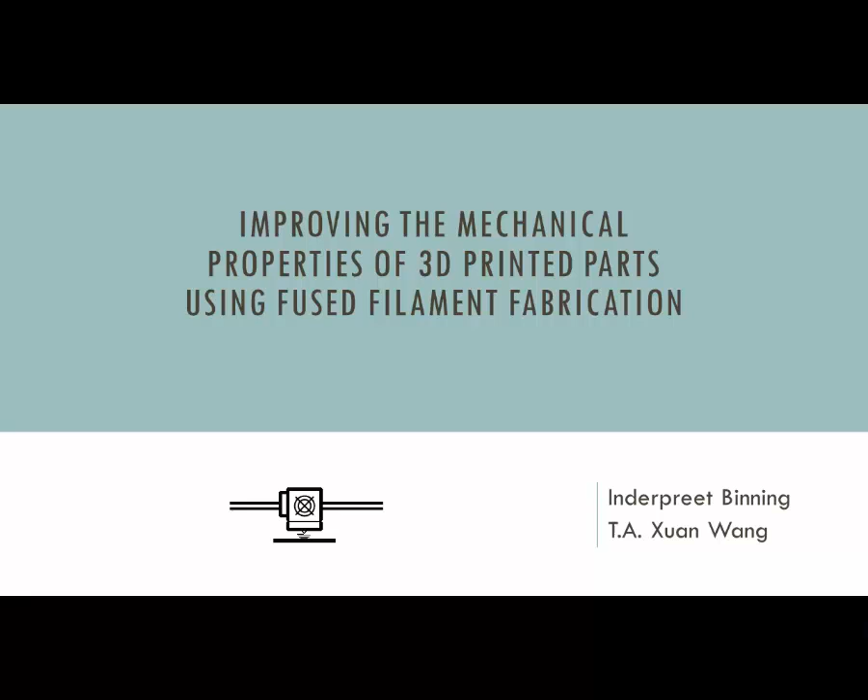Hello everyone, my name is Inderpreet Binning and my technical advisor is Dr. Wang. My project is titled Improving the Mechanical Properties of 3D Printed Parts Using Fused Filament Fabrication.

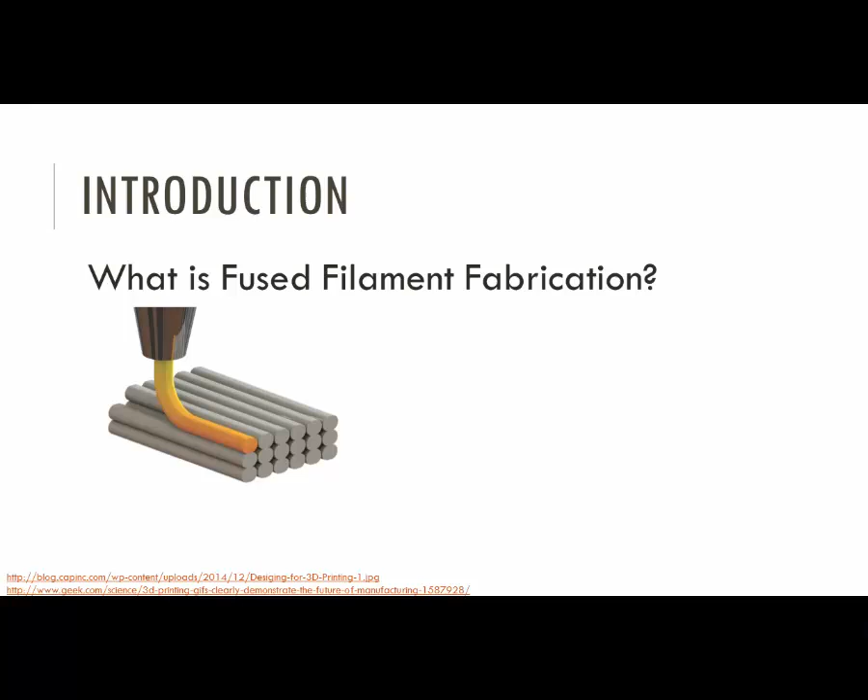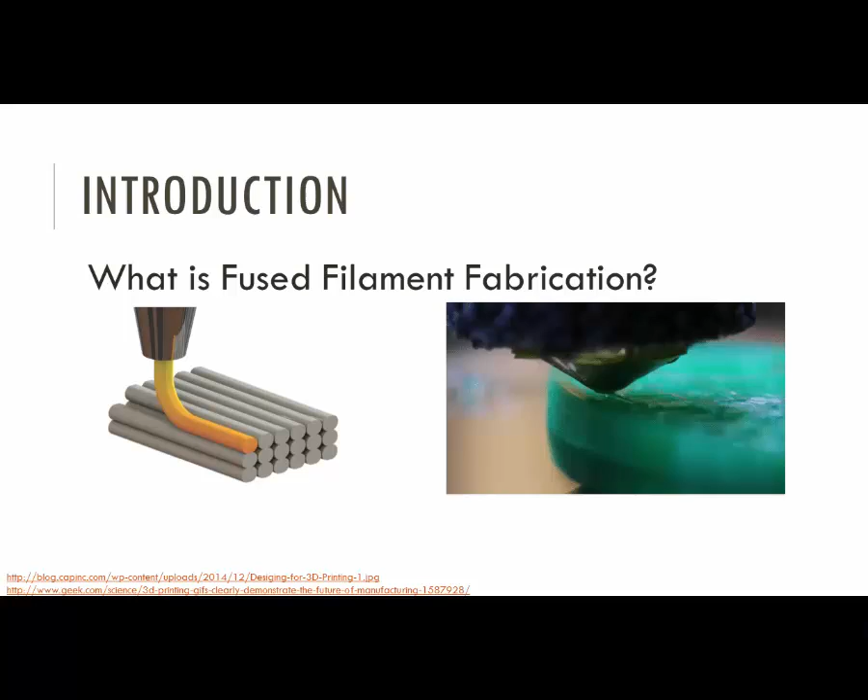So what exactly is fused filament fabrication? Well, it's technology used in 3D printing, and this technology works by heating up filament and depositing filament side by side on a print. As you can see on the illustration on the left, the material is deposited side by side, and then as each layer is completed, the process is repeated until the print is finished. The animation on the right side does a very good job of showing us this technology in action.

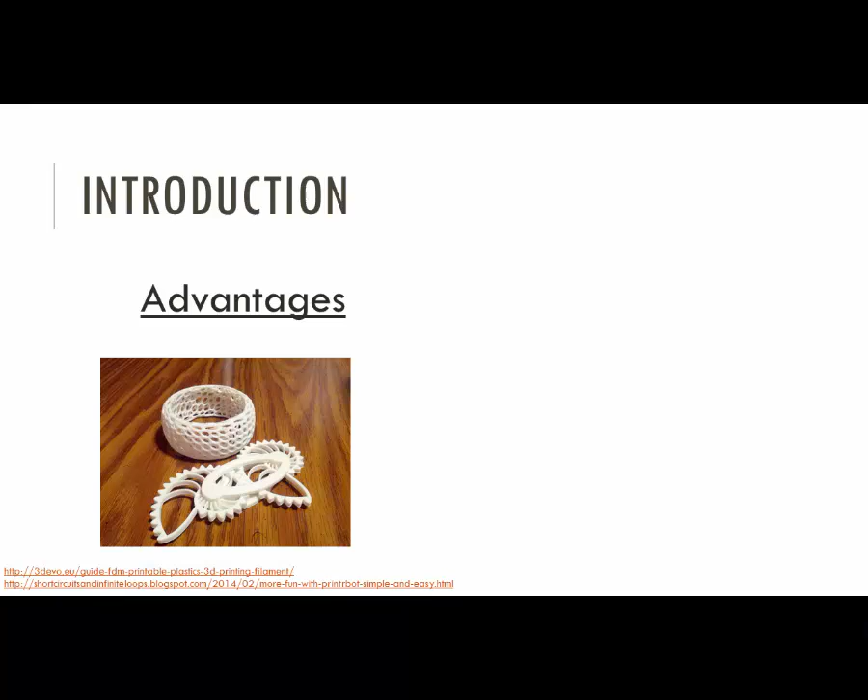So some of the advantages to fused filament fabrication are that it is relatively inexpensive, you get pretty good resolution, there is a variety of materials to choose from, and changeover is easy when compared to other technologies in 3D printing. There are some disadvantages as well. Some of these include the surface finish of the parts, the consistency of the prints and how they vary from print to print, and the biggest drawback, which is the mechanical performance of prints that are created using this technology.

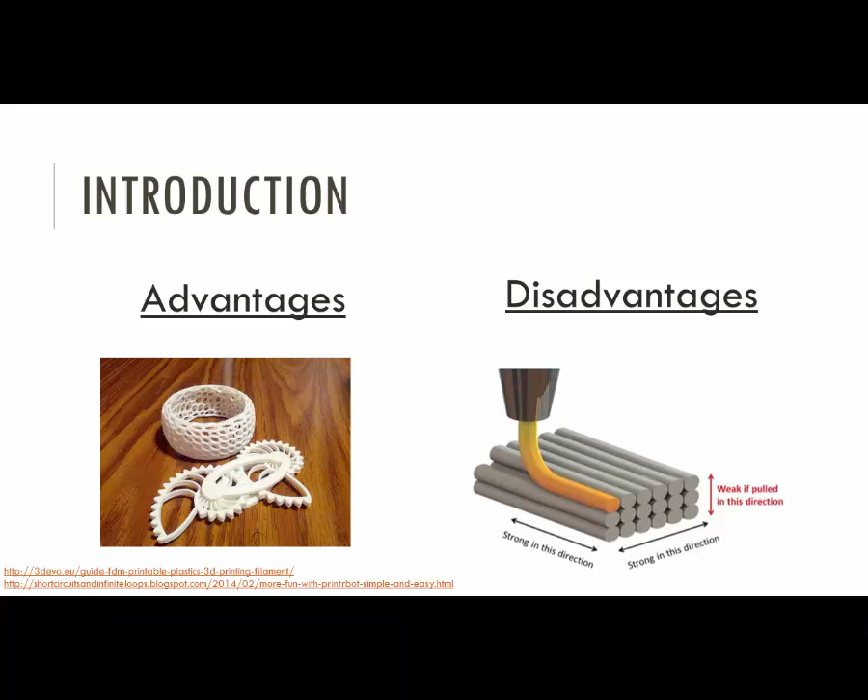And so fused filament fabrication lacks in mechanical performance, and this is due to the fact that the process itself is anisotropic. What that means is that the properties of the process vary due to direction or orientation. So if you were to compare, for example, a tensile load in the X direction compared to a tensile load in the Y direction. So in this illustration right here, in order to cause a failure in the X direction,

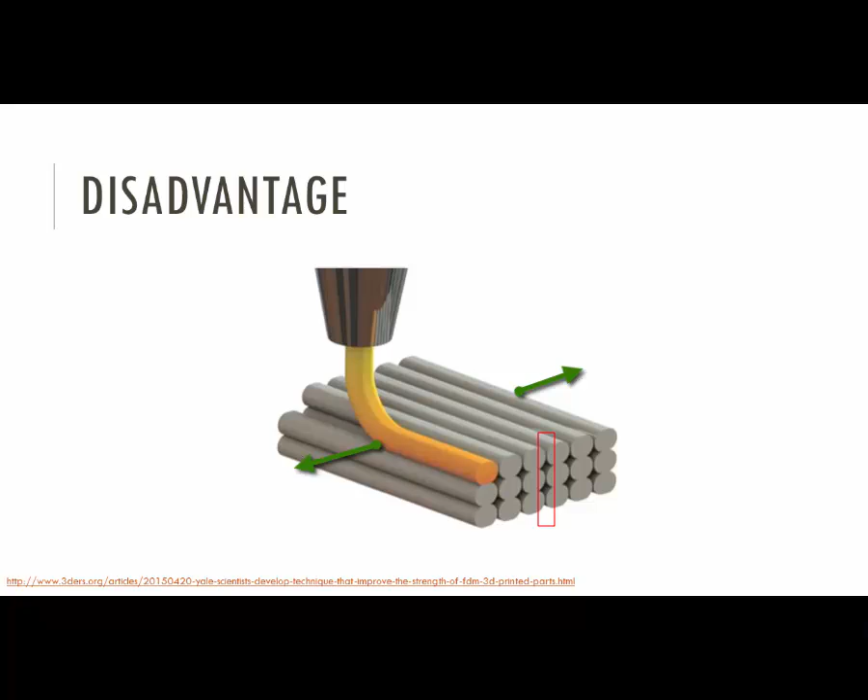I would actually have to apply a tensile load and pretty much pull these fibers apart. If I were to apply it in the other direction, in order to cause a failure, I would just need to overcome the strength of the bonds themselves. And so, as you can imagine, it's going to be easier to break apart the bonds, whereas it would be very difficult for somebody to pull apart the fibers and cause a failure that way.

And so the industry acknowledges that there is a lack of mechanical performance due to this process itself. And so the industry has come up with post-processing techniques. What that means is that after a part is done being printed, some sort of processing is done afterwards to improve the mechanical performance. One example is called infiltration.

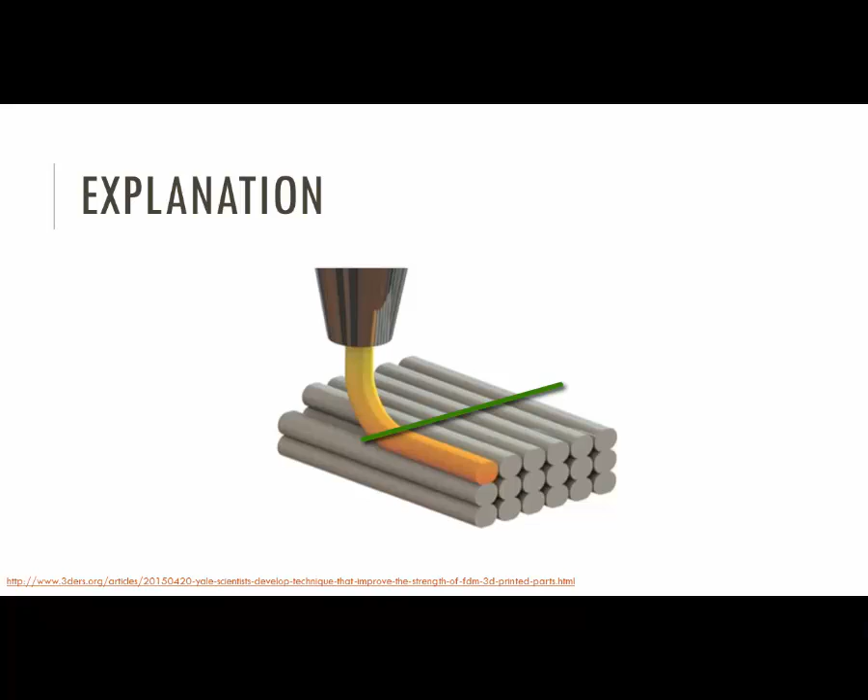In this process, the print is either submerged in a resin bath or it's coated with the resin, and it pretty much infiltrates the material or the surface of the print itself and kind of hardens and turns into a glue. And so how does this actually improve the mechanical performance? If we were to take a look at this print right here and actually cut it into a cross section, we would get something that looks similar to this right here.

And so resin infiltration is a good post-processing technique, but the issue with it is that it takes a very long time to cure. Cure times depend on how large the actual print is, but most times the curing time for this resin infiltration is longer than the printing time for the part itself.

And so the industry and researchers have found a variety of different solutions to this problem with the mechanical performance. However, what these solutions fail to take into account is the actual overall processing time for the entire process. So, as I mentioned before, for the resin infiltration, you have the time that it takes to actually make the print itself, but then you also have the addition of the processing time and the curing time, which will add up, and in some cases, depending on the size of the print, it could take over 24 hours to cure a print.

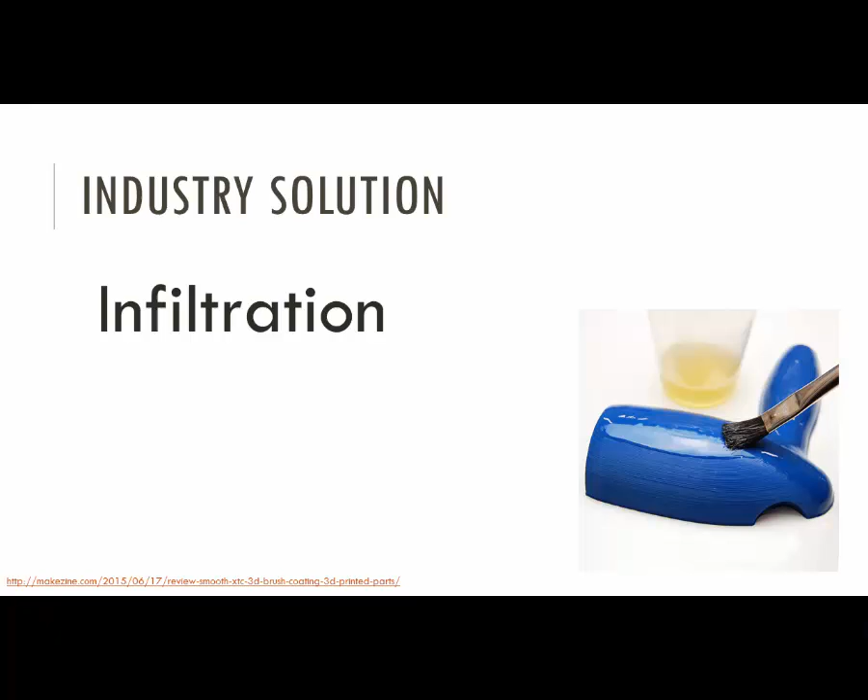And so what this project will be doing is investigating a new post-processing technique, and it's also taking into account the time for that post-processing method. We're trying to minimize that as we go through this entire process. And so Dr. Wang approached me with the idea of using a high-intensity lamp to investigate and see if this would be a viable option as a post-processing technique.

And so the idea behind this process is that, say if we were to print a single layer and then we were to flash it with the lamp, we want to see if the lamp can provide enough energy to pretty much remelt the filament itself and then cool it down, and while it cools down, form a better joint with the filament around it.

So what we want to do is see if it is possible to have a homogeneous layer. And so this would be done layer by layer by layer. So you would print a layer, and then you would flash a light, and then you would print another layer, and then flash the light, and see if you could get it to where the layers are homogeneous and there are no gaps in between layers.

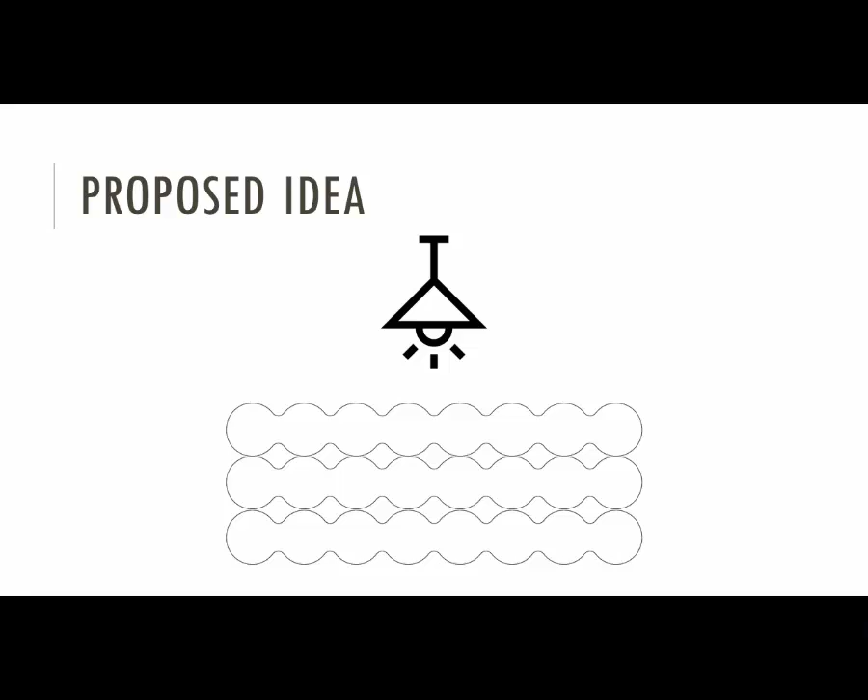So this project will be pretty much a design of experiments project, and I would be using a machine called a Sinteron, and this would be my high intensity lamp, and I would be adjusting some parameters on that machine and seeing the effects that it has on this response variable, which is the layer height, and this other one, which is going to be the actual height of the neck. After that is done, optimization will be done to figure out what exactly is the best setting using this machine.

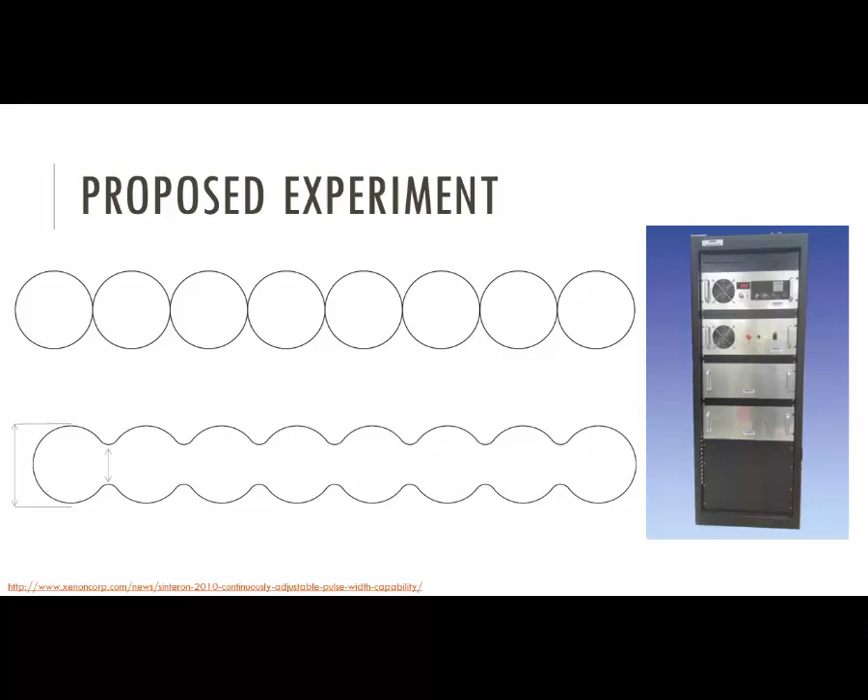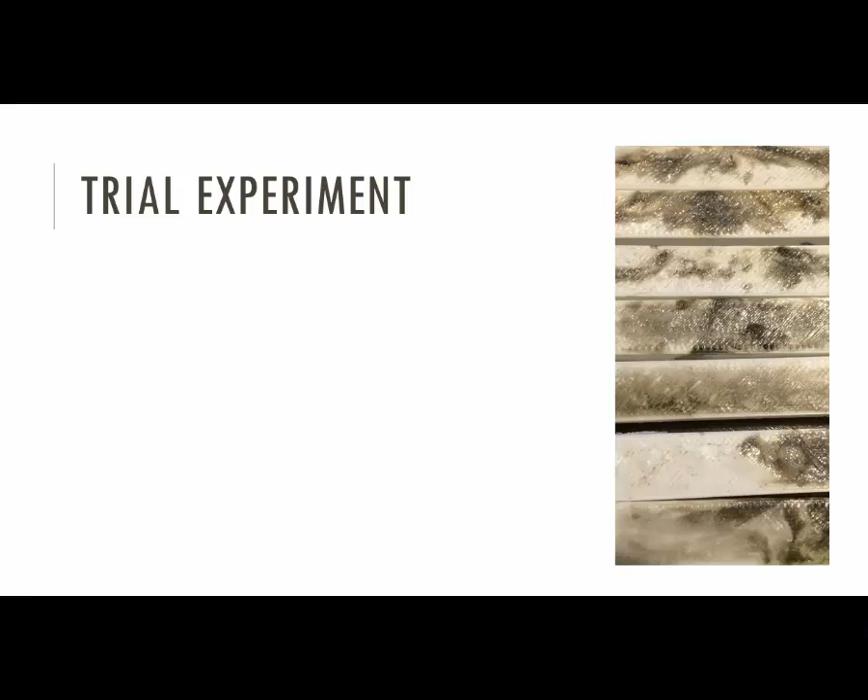Some of the findings that I got from the trial experiment were that a high level of voltage caused burn marks on the actual material itself. It isn't desirable. However, if you increase the number of pulses, you do get something that is desirable. You get a smooth finish. So for the actual levels of the parameters, we're hoping to use low voltage but increase the number of pulses.

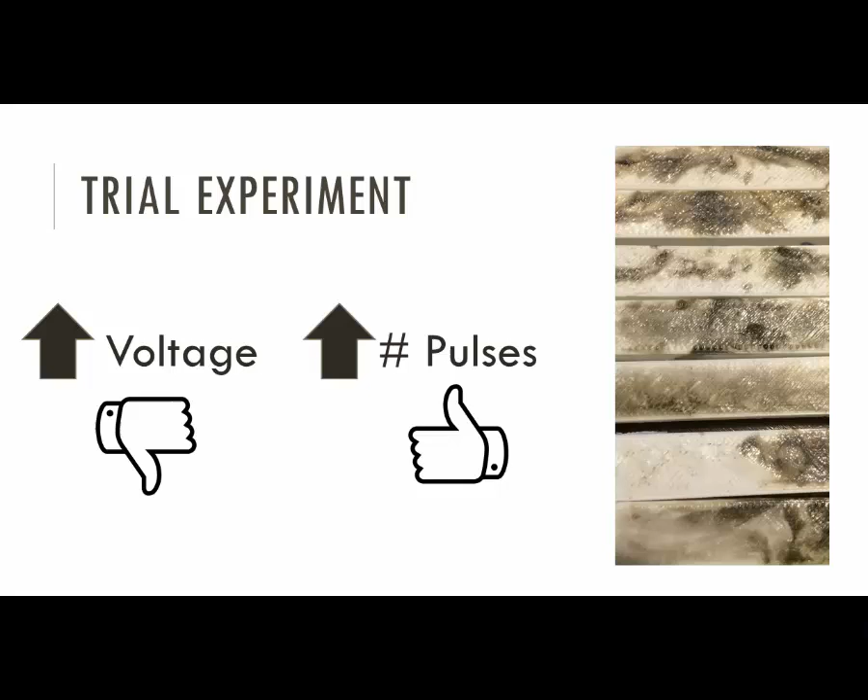In summary, this project will be investigating a new post-processing technique to improve the mechanical performance of 3D printed parts using fused filament fabrication and then doing optimization.